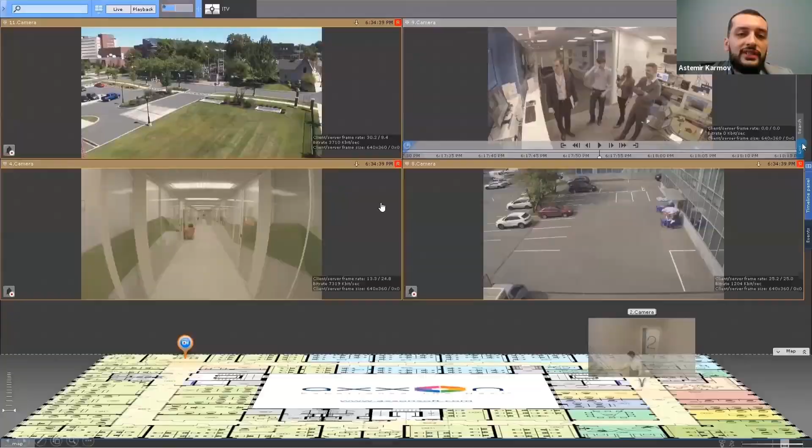How our interface actually looks like, you can see here. It's very user-friendly interface. We know it's very important for the African region to create something very user-friendly. You see here, you can export the video in AVI format, you can export the PDF, you can open it, play it.

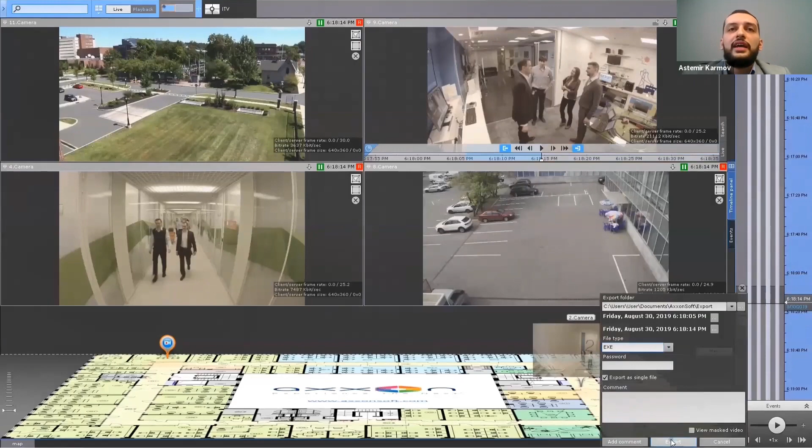If you want to use the video as evidence, for example, in court, you can export it in an exe file, and you can only open it with the specific Axxon player. You see it's watermarked, genuine Axxon video, so you cannot manipulate it or change it or do something with that.

You see, you can move out, edit, layout as you wish. You can add a system health board, you can add your event board in order to see all events simultaneously on the same screen.

You can see how your CPU is running smooth. You can have a web board as well here, where you can, even without leaving Axxon, you can Google something. You can have a map as well, and you can connect some third-party application without leaving the AxxonSoft web interface.

Video wall management here. Also, you can see that you can connect as many screens to your computer as your hardware allows you. So if you have a video card, for example, with 4 HDMI cables, you can connect 4 screens into one single PC, and then you can manage them as you want. One can be just a black screen monitoring with the alarms, one can be for your system health board, one can be just for your cameras, and one can be for your map or something like that, as you wish. We don't have limitations there.

As you see on that previous video, there are quite a lot of cameras running on a single PC. In order to achieve that, we're trying to set up a partnership with different brands like NVIDIA, Intel, so this one specifically, OpenVINO toolkits. You know that AI and analytics right now take a lot of hardware resources. In order to do the AI acceleration, we did some integrations with our partners from Intel and with our partners from NVIDIA, which basically, without too much technical stuff, allows you to connect more cameras to a single server, to use more AI cameras, or to view more cameras.

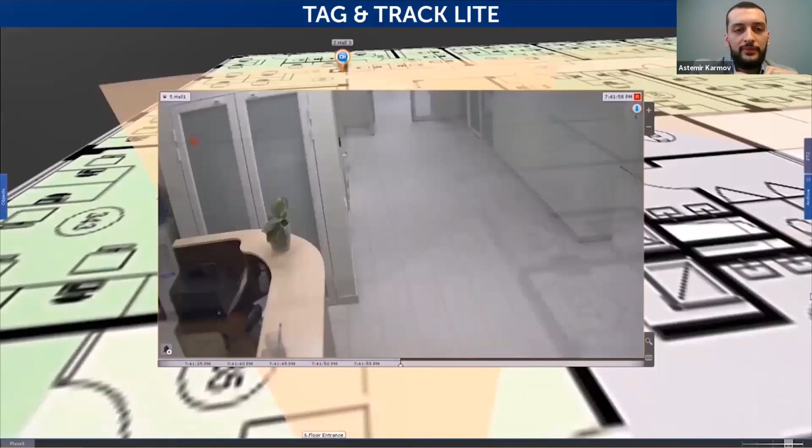Tag and track. We have 2 different versions. One is Tag and Track Lite, for normal bullet cameras - you see the camera track the person, and when the angle of that camera runs out, another camera picks it up automatically, showing where he's walking. It's automatic, so you don't have to click on the map or click on the camera - it picks him up automatically.

If you've got a PTZ camera and a bullet camera, it can be done with these 2 cameras. Basically, one bullet camera tags the person, and then the PTZ camera tracks him where he's going, moving automatically.

Links between cameras. Basically, you've got a layout, and without leaving the AxxonSoft layout or searching for cameras, you can create a link between one camera and another. You just click on that link, and you'll automatically be transferred to that camera you set it up with.

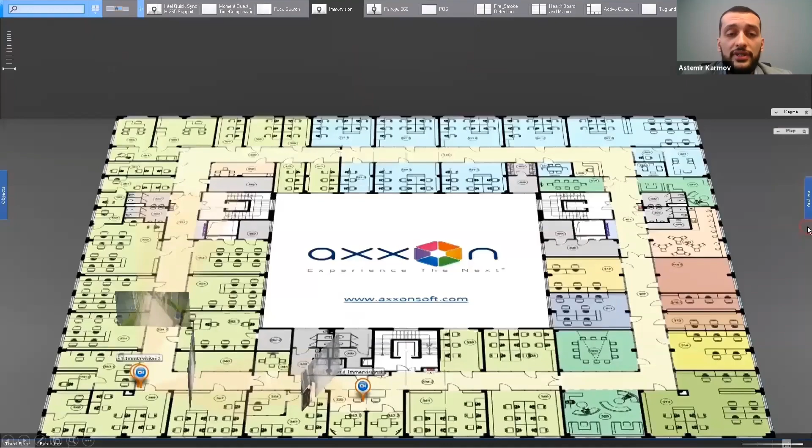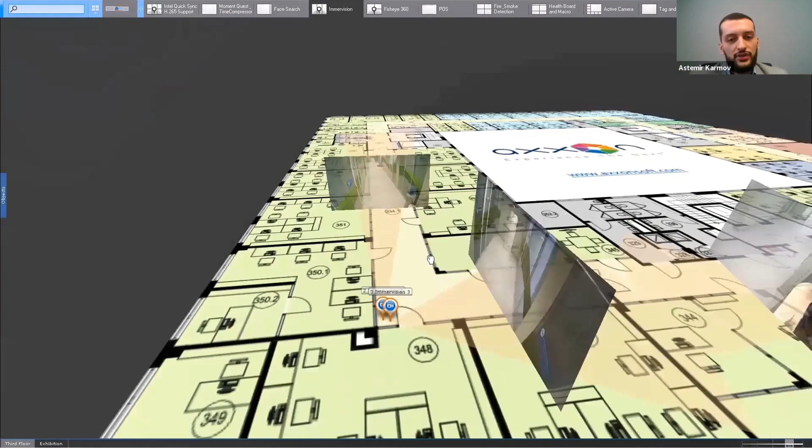Interactive 3D map. Some of you saw it, but I love this feature because it's very user friendly. You can add all your cameras to your map, click on the map, and nicely see in 3D where the camera actually is. With just 4 cameras you don't really notice it, but when you have a site with hundreds of cameras, you don't know where a camera is located. So you can click on it and see, okay, it's room number 337, or this camera is at room number 445, for example.

Also, when an alarm triggers, it automatically pops up. So you don't have to sit for 24 hours searching through all these cameras, staying awake. No, it will trigger an alarm and pop up on your screen.

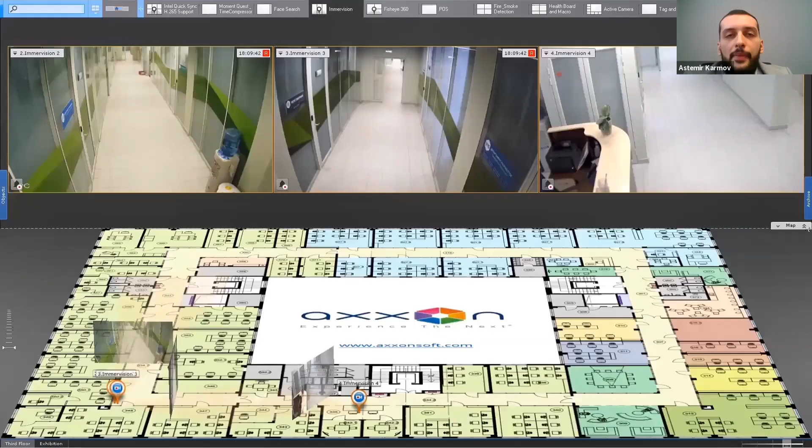Facial recognition. Some of you know we only had facial recognition before in our PSIM platform. Now we have very powerful facial recognition in our VMS as well.

Face and license plate search. Basically these 2 features are included in our basic Axxon Next Universe license, so you don't have to buy any extras.

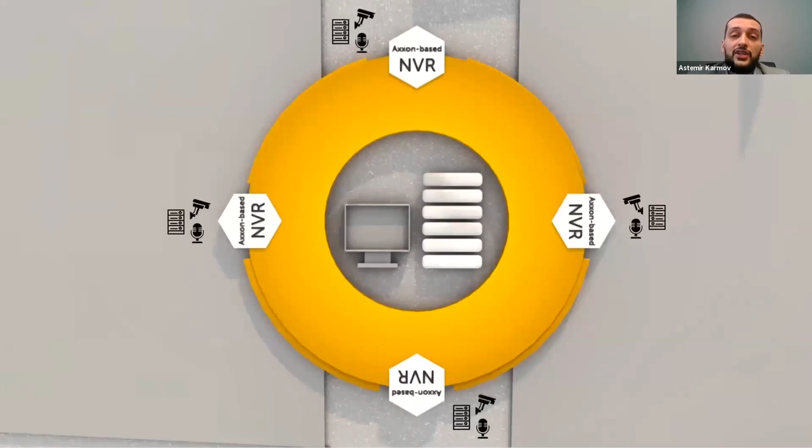Archive replication - you know you have quite a lot of problems with power, and a system or server can fail or go down, or something can happen to it. But if you have a replication feature, you're not losing your videos - it's automatically replicated to another server, so you can still use the videos.

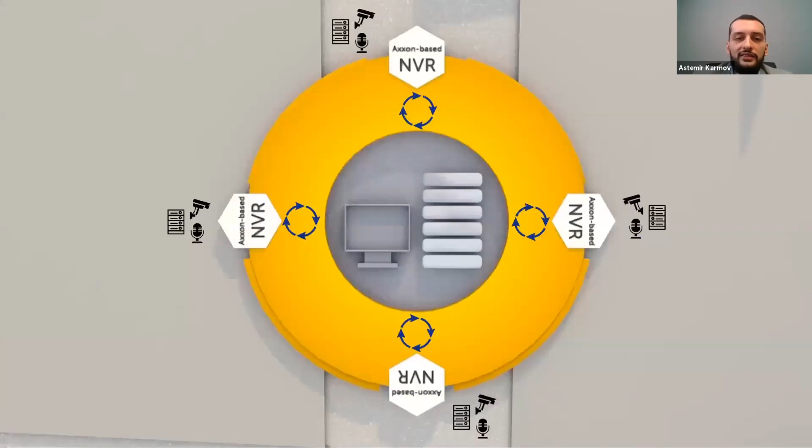Another feature for when you have a problem with the server is failover. When one of your main servers is down, the cameras are still recording on your failover server, and you're not losing your videos.

External system integration is the first step to full access control and fire alarms in our VMS. Basically, the VMS can receive events from different external devices and systems - cash registers, access controls, different third parties, and different fire alarms, for example.

As an example of the integration, you can restrict access to someone, and you can search by item. So let's say you're looking for Alex - you see, okay, Alex is here and he entered the place at 10 o'clock in the morning. So, for example, that's the first step.

Our developers are busy adding more features to access control, to make it fully supported with different interfaces, different functionalities, and importing/exporting of face databases. That's what we're busy with, and hopefully before the end of this year we're going to have it.

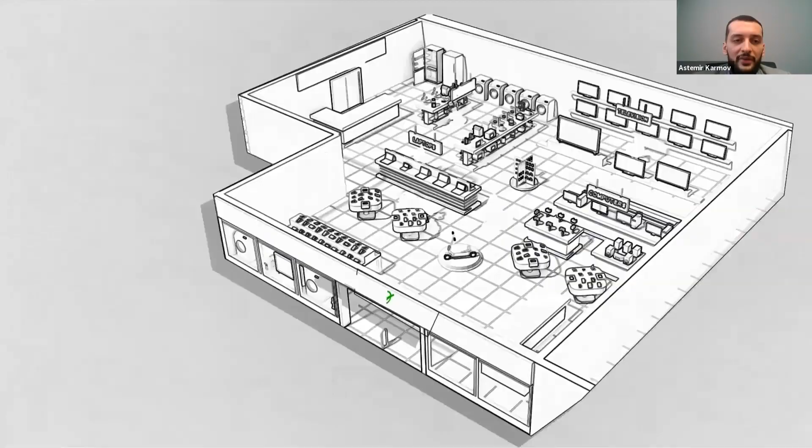How many people in, how many people out, maximum number of visitors allowed - boom, it's 50, triggers an alarm, for example. He left, okay, now it's fine.

AI object detection - here you see parking control time, also quite an interesting feature with AI. If some guy's parking time limit is exceeded, it triggers an alarm. Here you can see that wheel set.

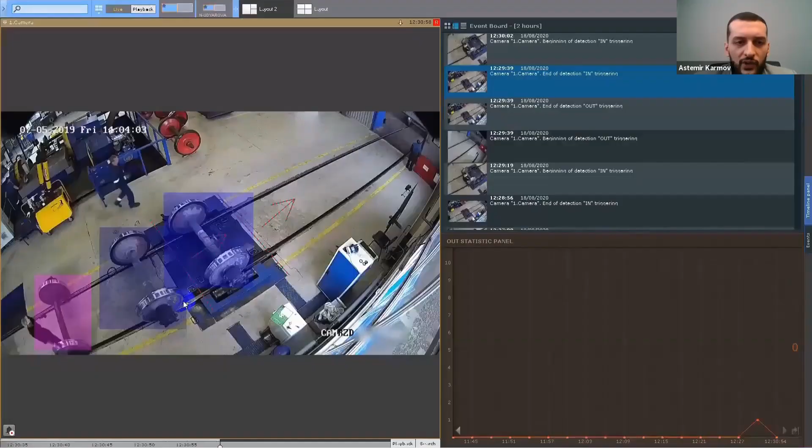The person is moving, it's 1, then it's 2, then it's 3, and at the end of the day you can see how many of them passed, because a lot of people are losing something. It cannot be just a wheel set, it can be some box or something else.

To answer your questions, you might ask how we can do it, what do you need for this. First, inquire, ask: can we do it? Here is the video, this is the camera view. We will tell you, okay, maybe you can do it, but you need to move the camera a little further, or a little closer. If we say so, you do it, then we ask you to export some videos and send them to us.

We basically collect those videos and send them to our developers. Our developers do machine learning, and after some time they give us a neural network filter back. We put it in our software, and it gives you fewer false alarms. We generate a little more videos, it gives us improvement. So that's how it basically works with all AI development and machine learning.

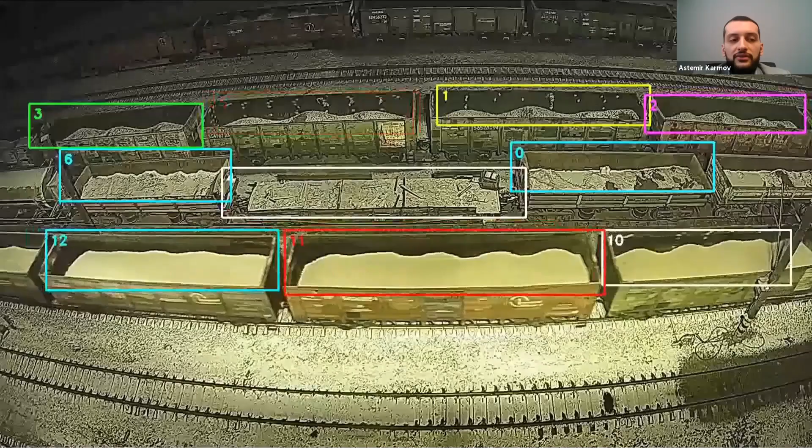Real world traffic statistic collection: how many wagons passed, for example, the system counts them. 1, 2, 3, 4. Again, at the end of the day you can see how many passed through. 12, 13, 14. So you're not going to lose one or two of them. Imagine these coal mines, all of them do this on an everyday basis.